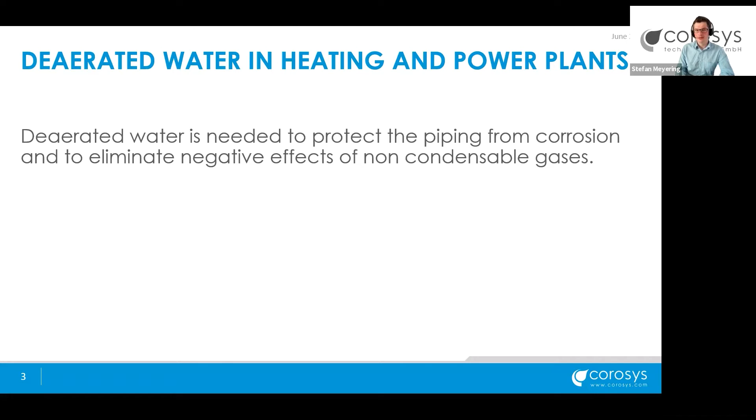So what is the power industry using deaerated water for? The main purpose is preventing corrosion and therefore also eliminating negative effects from non-condensable gases. Those are mainly used for network and district heating, as well as for boiler feed water.

In both cases, whenever gases are dissolved into liquids, you will have negative effects and obstacles to deal with, either if water is being added into a network of district heating - you always have to re-deaerate your water - or on the other hand, if you have boiler feed water, you use your steam, but it is necessary to get rid of the non-condensable gases, in order to ensure the best possible heat transfer on one hand, and to prevent as much corrosion as possible on the other.

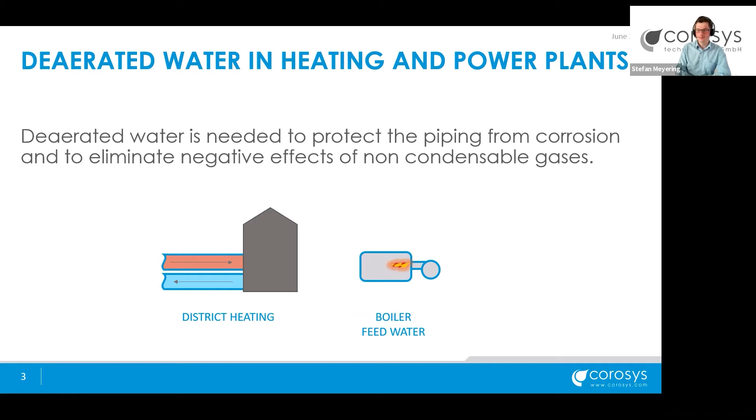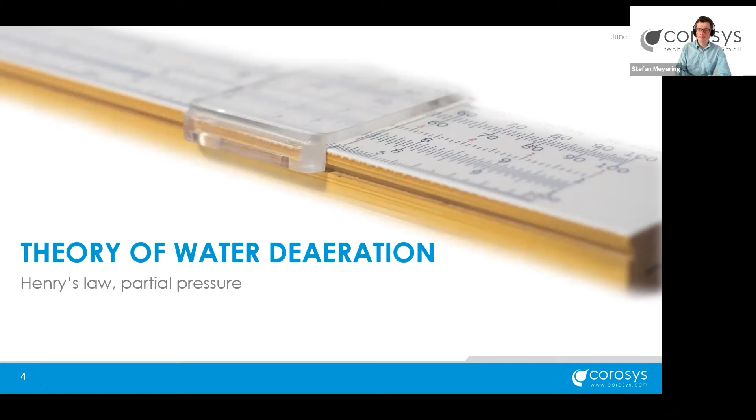Let's dig into the theory of water deaeration, talking about Henry's law and partial pressure. Looking at the system of water and oxygen, we need about a factor of 1,000 to talk about deaerated water. The solubility level maximum is 10,000 ppb or 10 milligrams per liter, and what we want is 10 ppb or 0.01 milligram per liter.

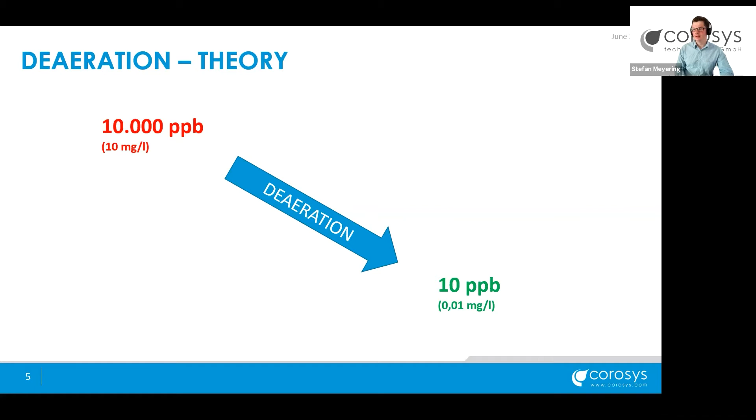That's a value where we can say that water is deaerated in such a manner that nothing can harm the heat transfer processes or have any huge potential for corrosion.

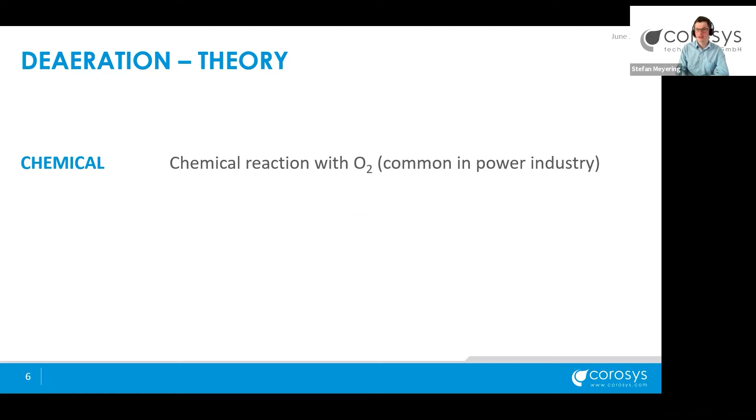There are two main opportunities, two main methods to deaerate water. One is very common in the power industry - it's the chemical reaction with oxygen. On the other hand, we have possibilities on the physical side, where we play with Henry's law in reducing the solubility of oxygen. So how is this happening?

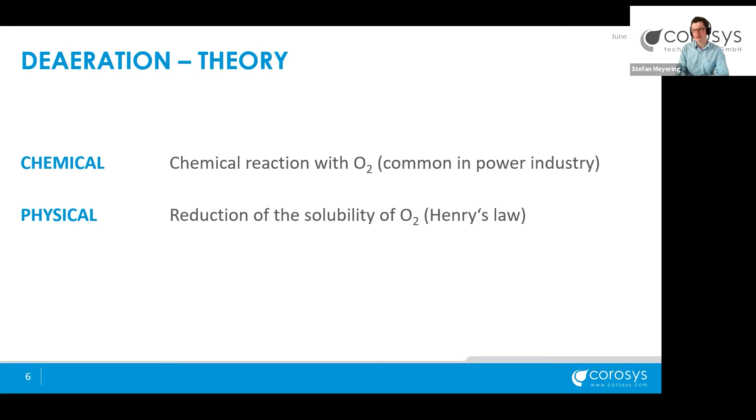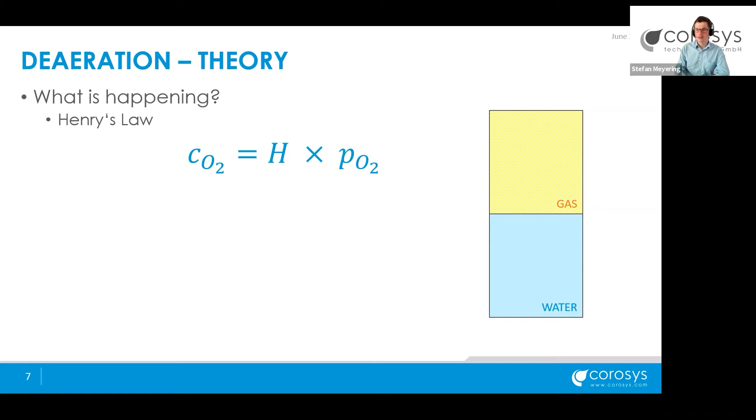Henry's law, to bring it back to mind, describes the concentration of any gas - in this case oxygen - by the partial pressure and the so-called Henry constant. It's a direct proportional function. So as the pressure on the gas layer above the liquid phase rises, we have an increase of the concentration in the water in the same manner.

So what opportunities do we have? We can lower the pressure to a vacuum, or use a stripping gas - something which is not oxygen but also has less solubility in water. Or we can raise temperature, as the Henry constant is temperature related. So the higher the temperature, the less solubility I get; the lower the pressure, the less solubility I get; or by the addition of stripping gas, creating an environment where the gases compete for solubility in water, I also gain less concentration in the equilibrium phase.

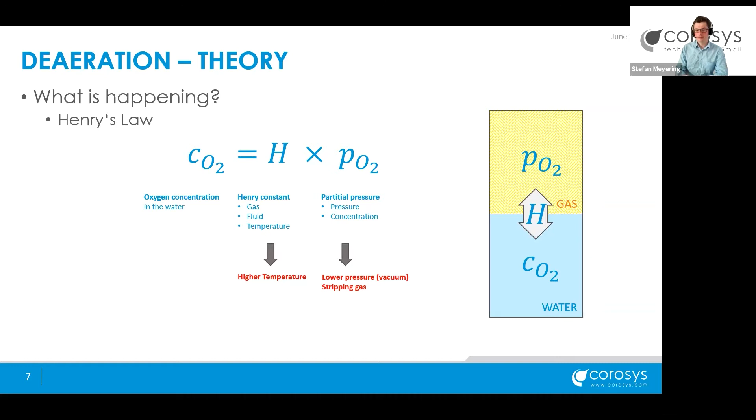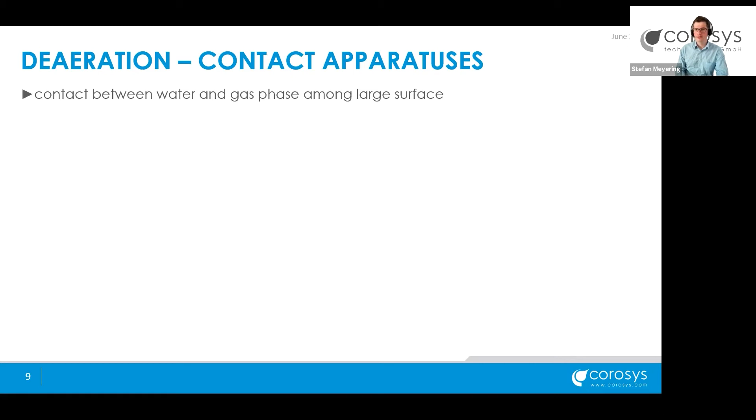How do those apparatuses look? What kind of systems are there in the market? What we always want is to create a contact surface between the water and gas phase which is large enough to make it as efficient as possible to deaerate, or to decrease the solubility of oxygen in water.

Usually the easiest apparatuses are so-called spray degassers or spray deaerators, which require a stripping gas such as nitrogen or CO2. By spraying the water in a vessel under vacuum, the oxygen is removed from the water, but not to a very sufficient value - usually less than 100 ppb, not more.

Positively, it can be mentioned that it's a compact design. The same compact design advantage applies for membrane deaerations, but here too we need an addition of stripping gas. On the other hand, the water has to be specially treated in order to not damage the membranes, or if so, the cleaning of the membranes isn't very easy or cheap.

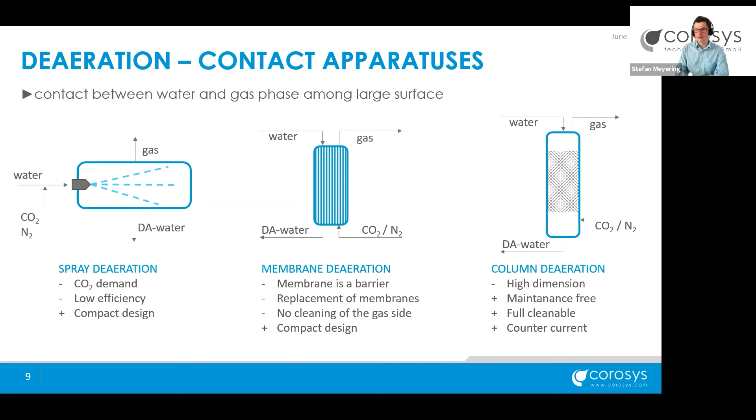For that reason, column deaeration, in our perspective, is something which deserves more attention to be used as a deaerator. One point is the high dimension, but on the other hand, as a full stainless steel contact apparatus, it's almost maintenance free, it's completely cleanable, and the counter current flow makes it very efficient.

So how is it done in the power industry? Let's take a look at the schematic of this boiler. Usually steam is introduced into the boiler feed water, and a mixture of steam and gas - such non-condensable gases - is released from the vessel.

Of course, this is also a compact design. It's something which is anyway present, so it makes sense to use it. As long as steam is present, this can be an opportunity to do so. Anyhow, you are losing steam, and it's not actual cold deaeration. So let's have a look at the column.

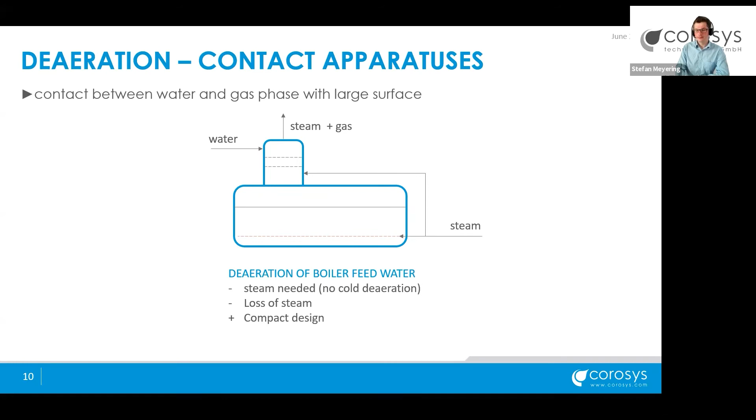I'd like to dig a little bit deeper into this one. As mentioned, the principle works on large surface, counterflow, and presence of stripping gas. So the cold water in this case is brought up to the top of the column, while there is a stripping gas coming in counterflow from bottom to top, which makes it very efficient and easy scalable, of course.

So machines between 1 and 100 cubic meters per hour are possible, as well as it's possible to go to a downgrade of the flow of about 50% of the design capacity. If there's any problem, it's still fully cleanable.

Inside of the column, you can see such stainless steel structured packagings for the surface creation. Makes it, as mentioned, quite efficient, and also the flow from between water and gas, they don't compete as hard, so it's really quite efficient to work with such contact apparatuses.

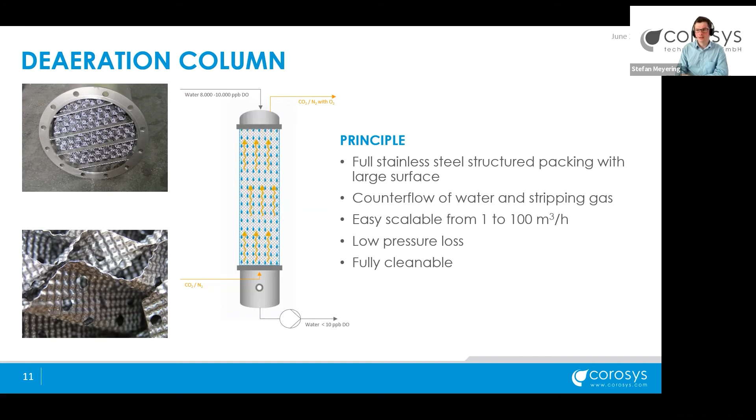So what brings us into the power industry? I mentioned quite a few times that the presence of oxygen, of CO2 or nitrogen as common stripping gas is needed. The addition of any stripping gas is needed, but nobody has CO2 or nitrogen in the power industry if you won't buy it.

So we designed a patented system for the power industry where the actual stripping gas is generated by the incoming water itself. So how does that work?

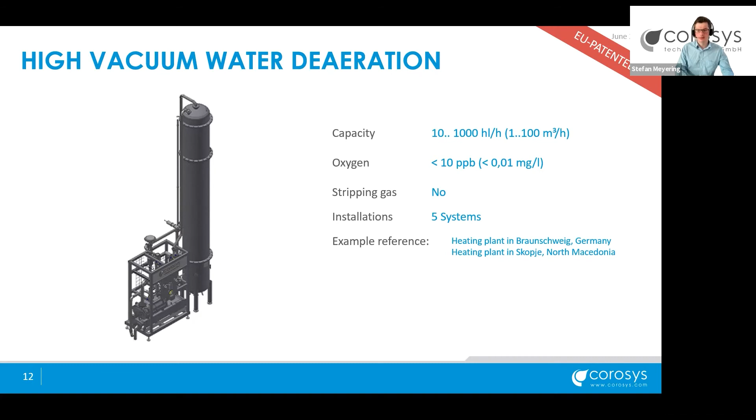This brings us to the high vacuum water deaeration. As mentioned, there are several deaerators where you have to add stripping gas, but usually in the power industry, no CO2 or nitrogen is available. If not, you have to buy it.

So we designed it for the power industry in that way that the system is creating the stripping gas by itself, namely cold vapor. So how is it working?

We are using a vacuum pump and a double stage column, which helps us to decrease the present pressure in the column in that way that water starts to evaporate to a certain amount. And this tiny amount of water is taking over the role to be a stripping gas.

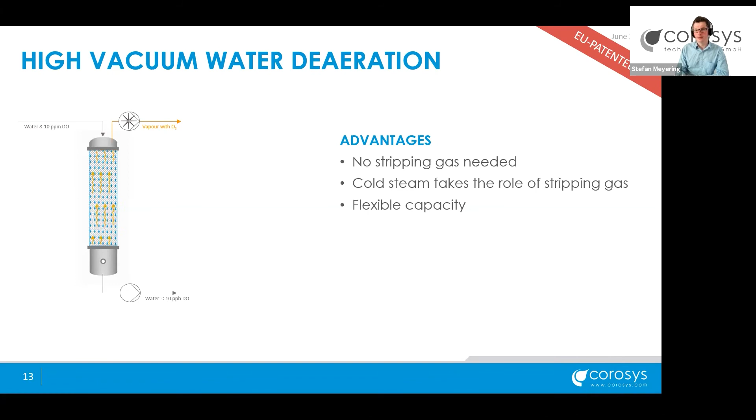So how is it working? We have two stages. The first stage is comparable in its function with a spray degassing. So water is brought up into a vessel with less pressure available. So whatever can be removed is initially removed, and we see water at about 100 ppb entering the second stage.

Here in the second stage, pressure conditions are less than the vapor pressure of water actually is. So this means that a small amount of water is evaporating and therefore taking over the role as a cold steam, taking over the role as stripping gas.

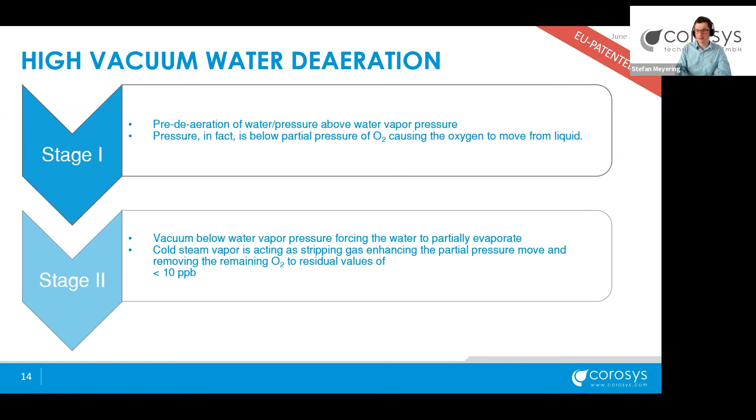And then the partial pressure drop is moving the remaining oxygen to residual values of less than 10 ppb. So the actual environment in the second stage is creating conditions where oxygen isn't very likely to dissolve into the water. So we get totally deaerated water.

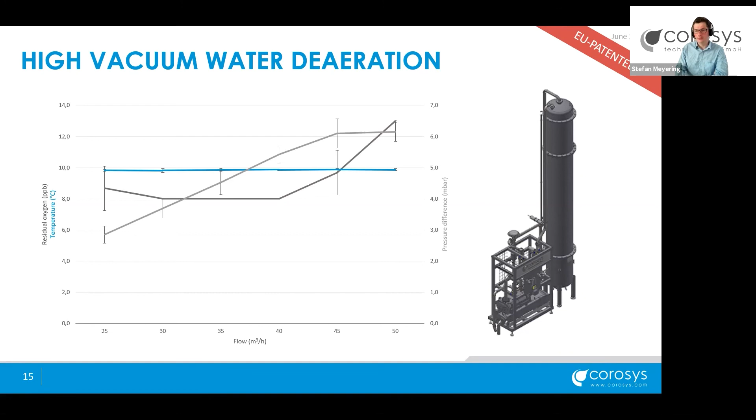So for this system, it's very important to have a properly sized capacity for whatever is needed for your heating power plant. On the other hand, to know about the temperature conditions. Both are very important to know, because all we do is play with Henry's law, basically.

So the function of the high vacuum water deaeration: water is coming in, going to recirculation. Once the oxygen level is okay, the system switches over to go into the network.

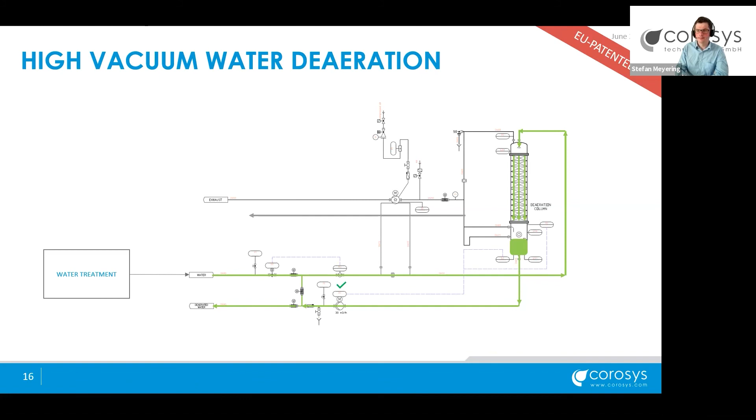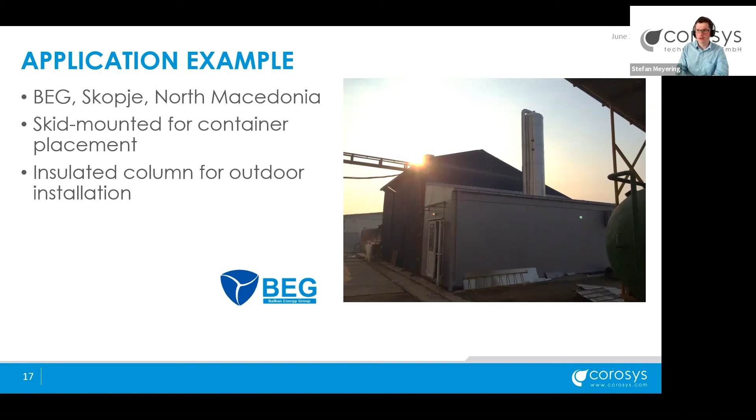Short application example at BEG in Skopje. We've built such unit as a skid-mounted unit for the container, outdoor placement with insulated column, so it's no obstacle to work around things. I mean, column height is the only disadvantage, but there are solutions that work out and also represent industrial standard.

In Skopje, we're using a double screw vacuum pump, so that there's always one for redundancy. It's feeding a heating power network for the city of Skopje, with a deaeration feed of about 30 cubic meters per hour, and of course with less than 10 ppb.

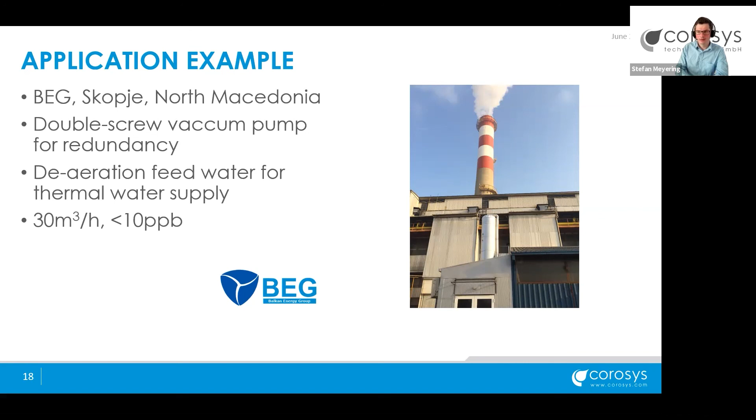So at the end, I would like to draw a conclusion. Of course, deaerated water is something that contributes your corrosion prevention, so nothing to just skip. Deaerated water systems mustn't be complicated or over-engineered. They can be quite simple and easy to handle.

Deaerated water systems do not necessarily demand stripping gas, like CO2, nitrogen, live steam, so nothing to buy or to waste. We just can use our cold steam vapor process. And deaerated water produced by column method can be a cost-effective alternative to chemical deaeration. Also take the environmental impact into consideration if you think about using another alternative method for water deaeration.